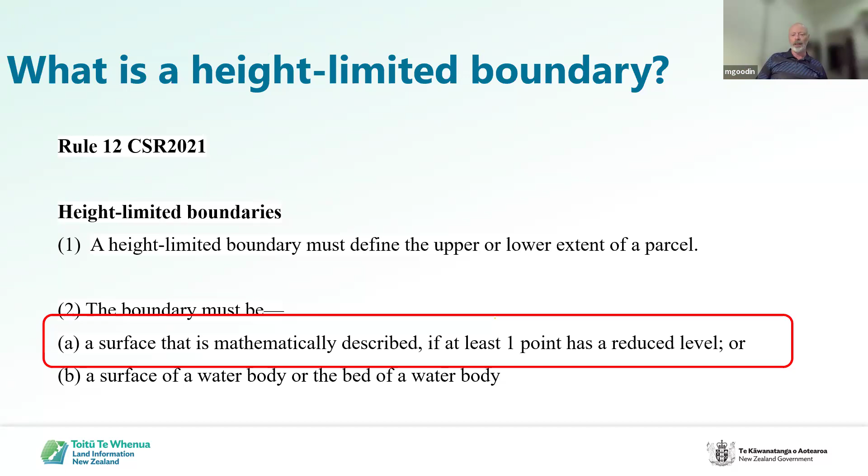So let's start at the beginning. What is a height limited boundary? Rule 12 of the Cadastral Survey Rules is probably the best starting point. For this session, I'm only referring to Rule 12.2a, which deals with mathematically described boundaries, particularly horizontal planes. As a starting point, the note 'all height limited surfaces are horizontal planes' would assist in meeting the rule. It's important to note that ground level is not an appropriate description for a height limited boundary anymore. You will see plans that still have it, but don't do that now.

So a boundary defined by a reduced level is a height limited boundary. A parcel with a height limited boundary is now a height limited parcel, and a height limited parcel has a height limited appellation. In the diagram, that sounds pretty basic, doesn't it? But in the diagram, both primary parcels share a height limited boundary, but neither has an upper or lower limit. I'll refer to this through the exercise as a step. This might seem very basic to a lot of you, but we do get CSDs where height limits, because they involve a step and not a true upper or lower limit, are submitted without acknowledging them as height limited parcels.

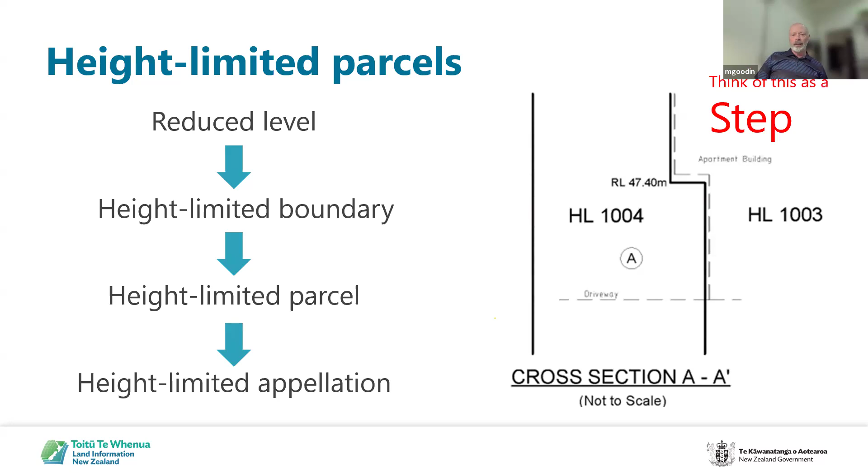So we've got our step. All right.

So let's start with a significant part of the process, the vertical datum requirements. All reduced levels in a survey must be in terms of a single official vertical datum. It's Rule 18. As hopefully you're all aware, the official vertical datum is New Zealand Vertical Datum 2016, and that's the only one that can be used for cadastral surveys, with the exception of existing unit plans, which we'll talk about later.

Now, put something in red there, so that must be important. Currently, there is no exemption under the cadastral rules that allows the reduced levels of an existing height limited primary parcel boundary to remain in terms of the datum of the source CSD that they're adopted from. So they must be in terms of NZVD 2016, unless dispensation is granted because the requirement is impractical or unreasonable.

Then you'll say, but what about non-primary boundaries? Because quite often in those situations, nothing's changing. Rules 60 and 75 may be interpreted to allow the reduced levels of an existing height limited non-primary parcel boundary that are adopted or accepted as part of a new non-primary parcel to remain in terms of the datum of the source that they adopted from. However, all reduced levels must be in terms of a single datum, and the CSD must not create any new height limited boundary points - that's key there. So if you're going to create new easements with new height limited boundary points, then all bets are off and everything must be shown in terms of NZVD 2016.

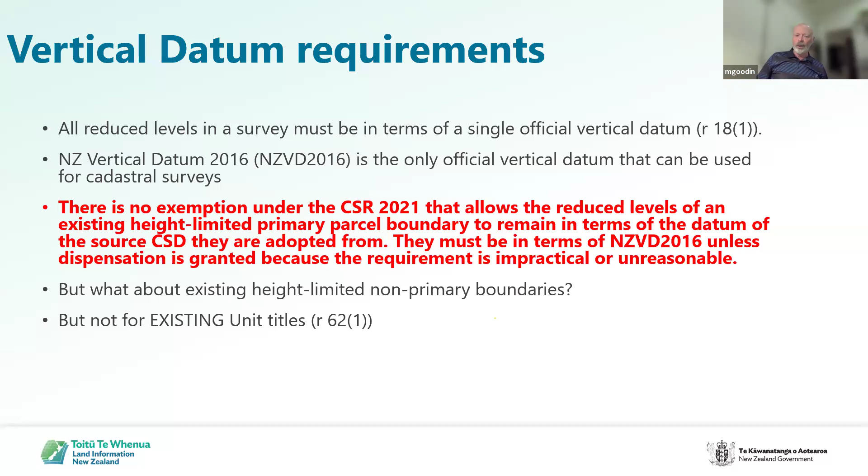Now, of course, it's different for existing unit titles. Rule 62.1 requires that reduced levels in a unit development must be expressed in terms of the datum used for the previously deposited CSD for that unit development, and this may be an unofficial datum. However, I'll discuss a bit later on - there are situations where that does have to change.

So, across the question, how about a dispensation then? The Office of the Surveyor General have been receiving large numbers of requests seeking dispensation from the requirement to be in terms of NZVD 2016. I'm just raising this - they have updated their dispensation guidance on the webpage to provide specific information about dispensation requests relating to the official vertical datum situation. Basically what they're saying is it will only be granted in exceptional circumstances. You need to provide your reasoning and really provide that sort of information that will assist. So that's on the dispensation page, if you want to have a look at that. I said I'd raise it for the OSG, so I have.

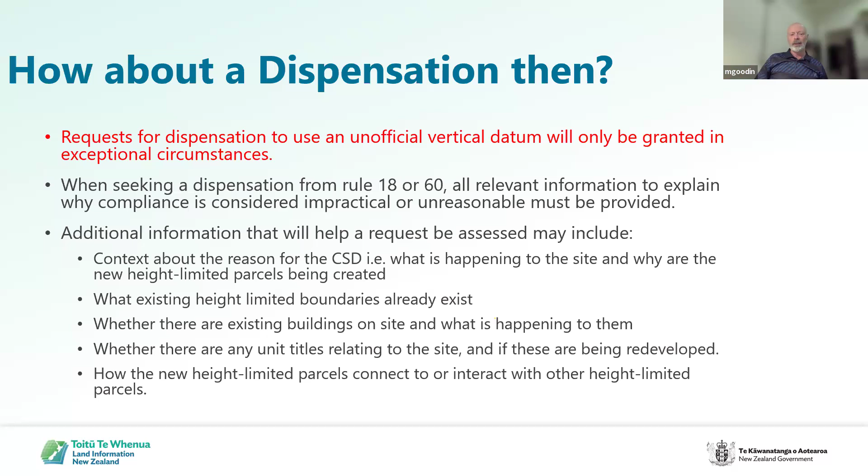Okay, reference marks. There are different reference requirements for boundary points on primary parcels, unit parcels, and other non-primary parcels. A new height limited boundary point on a primary parcel must be referenced by a PRM, and the survey itself must include at least 3 PRMs, 2 of which must have a reduced level. A new height limited boundary associated with an easement, lease, or covenant, or if it coincides with an accepted boundary, does not require a PRM. Now, we're talking PRMs, not BCMs. And a new height limited boundary point on a unit parcel - remember we're talking RLs, not permanent structure boundaries - must be referenced to a PRM. That's Rule 61.

This requirement also applies to unit redevelopment. So if you're going to retain RLs as your vertical boundary definition - you can change to PSBs if it makes it easier - but if you are going to retain your height limited boundaries, and as a result of redevelopment you create new height limited boundaries, then you need to meet the rules.

You need to retain the datum, but you need to meet these rules. The survey must include 2 PRMs with reduced levels, and any reduced levels for PRMs need to be on a survey diagram. That's just one of those requirements.

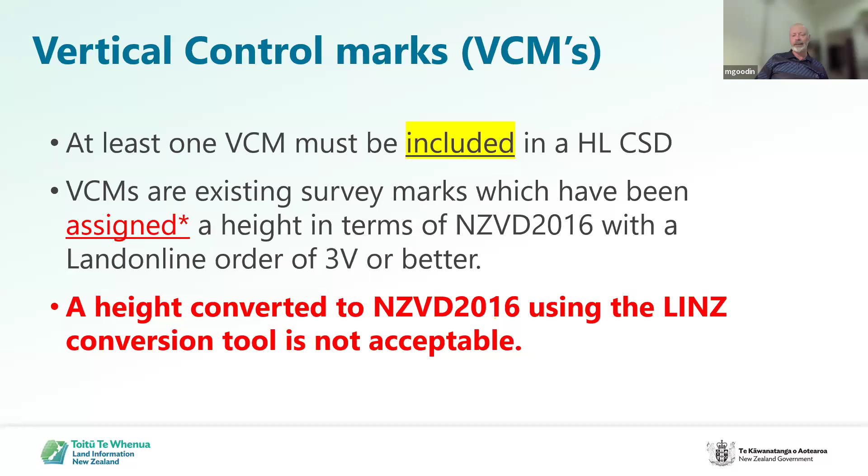I just thought - I think we did raise this, we'll have questions later on, that's fine. You often see the term 'VCM must be included.' I just wanted to explain that one - it is there for a reason, but sometimes people aren't quite sure what's going on there.

So 'included' means that it does not have to be spatially captured, but its details must be included in the CSD. So what the guidance is saying is you need to provide the reduced level in terms of the mark name of the VCM and its geodetic code, the reduced level of the VCM, and the applicable vertical datum.

I just highlight, please do not forget Rule 71 as far as field information - you can't just put that information on your plan, because your survey needs to be in terms of that VCM. So you need to have at least visited that VCM to prove that it meets the accuracy standard, still there for a start. So VCMs should only be old marks, and you will need to provide field information for that mark.

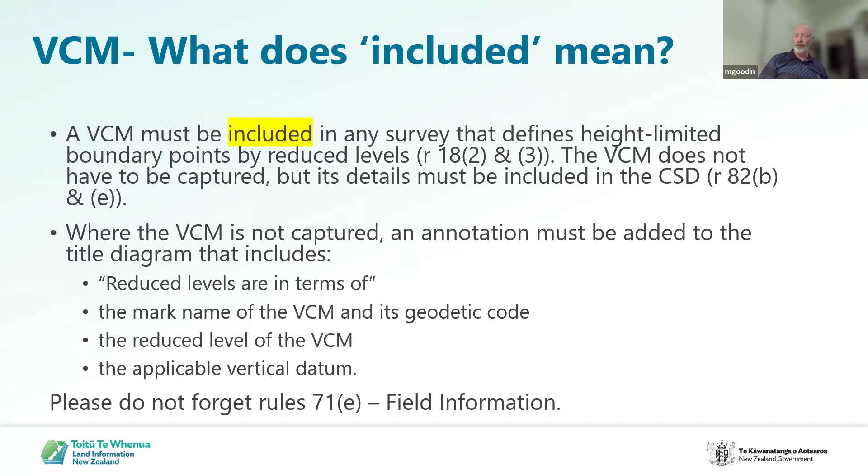Which I'll also comment on a little bit further on. There's a lot of further going on, isn't there? Anyway.

So we talked about parcel appellations - really important. A lot of people forget about this or don't think about it. Where it is a height limited parcel, it must have a height limited prefix. That's the rule, and that identifies it as having that height limited aspect - not just for surveyors, but for the owners, lawyers, whoever.

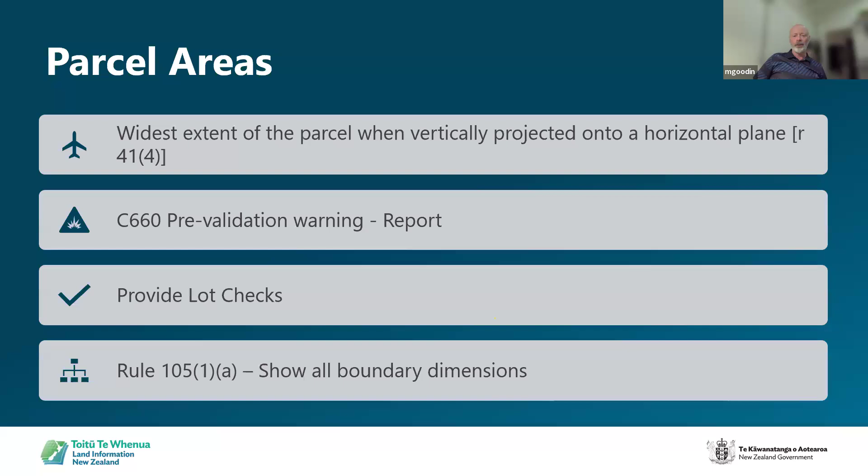Just provide those checks, make sure you've done your own - do your spatial check, your ground floor spatial check, and your upper level spatial checks as appropriate. Okay, so hopefully that's coming through clearly enough - that's the diagram from the guidance, and the green shaded area is the rogue area that gets missed.

Now, as I mentioned, old school - and I personally don't have a problem with showing it - is that some people will show different heights per other level. So the spatial capture, which is the one you'll show, even though it's on the spatial capture on the ground floor, it will be the full area.

But if you want to provide other heights, other areas at different levels, you can put it in user added text - just make sure it's correct. We're not going to check it, but if we do check it and we find it's wrong, we will requisition you because it's on a CSD. So just make sure it's not required, but you can get a requisition for it - just make sure it's right, please.

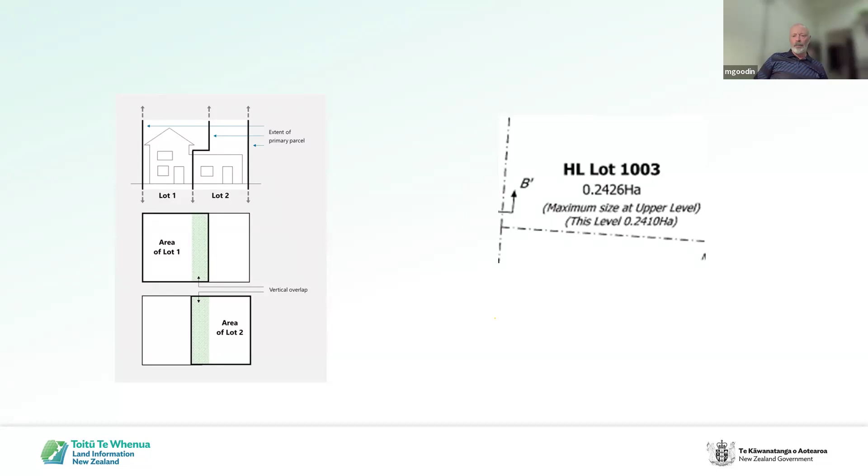Okay, schedule memorandum - upper and lower limits can be added to the schedule memorandum. There's no issues there. That may change in the future, but we're just testing that one at the moment.

The vertical step I talked about in a parcel is not considered to be an upper or lower limit. So if a parcel doesn't have an upper or lower limit, do not include it in the schedule - just leave it blank, don't even bring in the option of putting a limit on there, because it will get requisitioned if it's not the true limit. As I say, step - don't apply it.

Now, the other thing with schedule memorandums that does catch people out is the vertical extent of height limited parcels needs to be depicted in the title diagram - that's Rule 97, if you want to take a note of the rules. Because the schedule memorandum does not form part of the title diagram, including an RL only in the schedule memorandum as the only reference does not satisfy that requirement, and you will get pinged on it. You won't be told to take it off the schedule, but you will need to add it somewhere on the plan face.

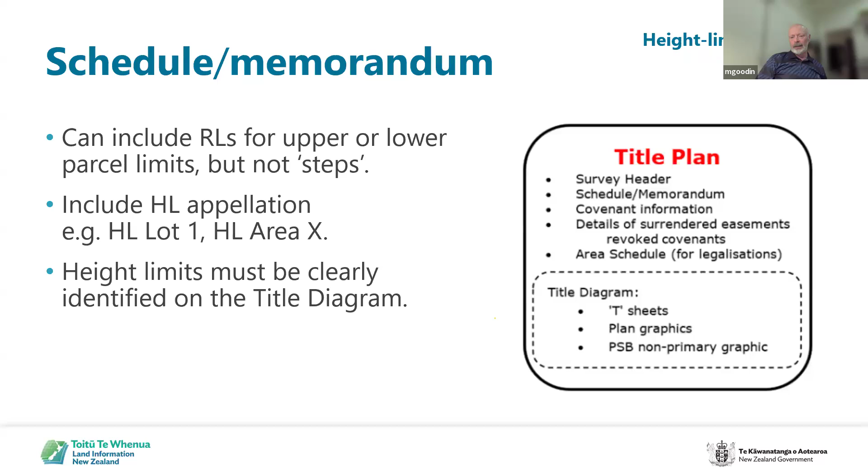Reporting on the vertical component of a CSD is typically not well done, but it is just as important as horizontal. If you're prepared to put effort into horizontal, think about the vertical too. We want to know how you are meeting accuracy tolerances, and it's not just for you guys.

Everyone else is going to use this, going over your plan. Another subsequent surveyor needs to be confident, so the survey must include details about the basis for determining the origin, and the report should describe how the reduced levels were established and confirmed.

You might be coming off your base, off your building, doing everything by GNSS, and you will then go and pick up your VCM as well, plus another to check your heights, hopefully with a bit of redundancy at least. That information is really helpful for everybody, it shows how good your levels are.

You don't know whether that mark is good unless you've got just good survey practice, which some of us older surveyors still hang our hats on.

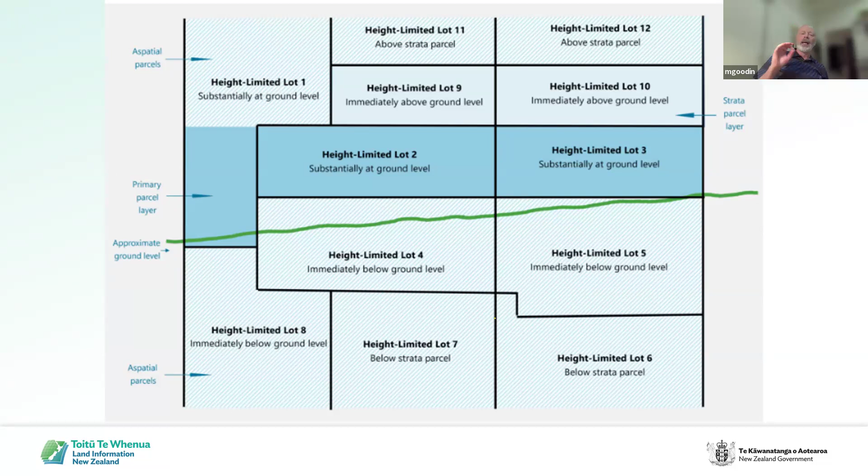Now, I know you're going to say lot 1 doesn't, but it does, trust me. So they get captured in your spatial capture layer, the primary parcel layer. Now, either lots 9 and 10 are either captured in the strata topology layer or 4 and 5. So let's say we captured 9 and 10 in the strata topology layer.

But because you can see that height limited lot 1 has that darker blue capture, it doesn't get captured in the strata layer at all. It just retains in there. And what will happen is all the other information would be shown in plan graphics.

So lots 11 and 12 would be in plan graphics, and 4 and 8 would be in plan graphics, etc.

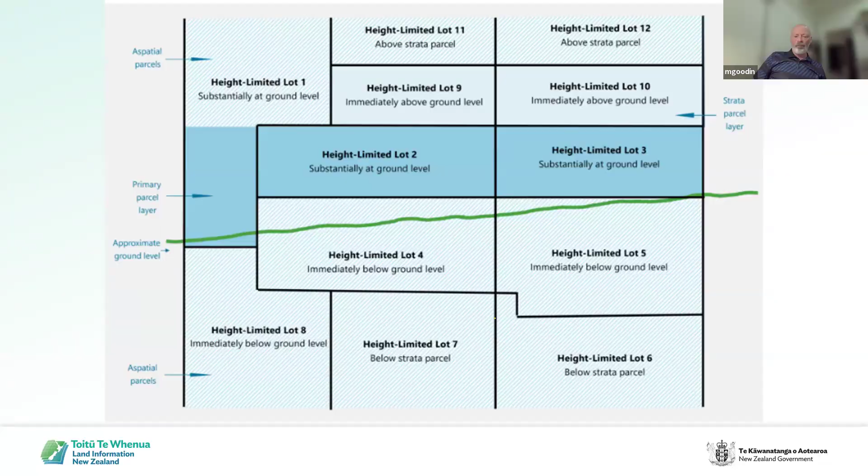Coming back to the original slide, unless an exemption from the standard is granted. I do get in a little bit of trouble referring to this, and I have tried to convince a few others. In my opinion, capturing those parcels immediately above the spatial capture in strata doesn't really add a lot, especially when, for example, you've got a 10-story building with ground level captured at primary, and levels 2 to 10 captured as plan graphics. What is the advantage of capturing level 1 at strata?

Now that's a different story for a tunnel or a bridge, for example. The guys working on CRL up in Auckland, having that tunnel captured in the strata layer is really good, because you can click on it and people can actually see how that strata connects up. Whereas in the building situation, it doesn't really add a lot, and in fact it actually just causes confusion. So I would grant you an exemption to just capture the ground floor and then everything else on plan graphics. And if you get a requisition, tell them to come see me.

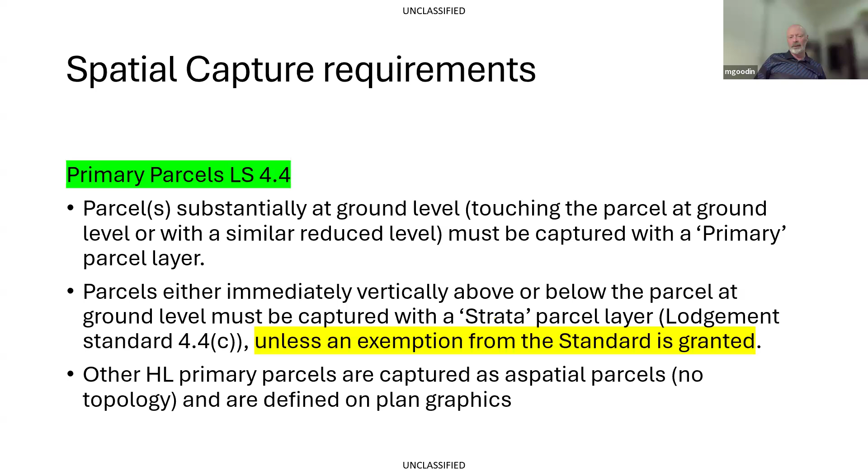So we're looking at non-primary parcels, the lodgement standard again. There's similar requirements, but in this situation you have the secondary layer, tertiary layer type arrangement, and they should be used. So you've got to think about this - use it, but don't confuse this.

This aspect is height limited non-primary parcels. Don't get too confused with your standard right of way and water easement at ground level - they're going to be crossing, and the use of tertiary and secondary is, in the end of the day, the same thing. It's to allow these parcels to cross, because Landonline doesn't allow it, or causes problems for it. And with new Landonline in the future, once we've got some more enhancements, that may be a thing in the past. But just make sure that you are capturing, and then once you get the secondary, tertiary, then you go into plan graphic again.

So you're more likely to have the three components in the non-primary scenario.

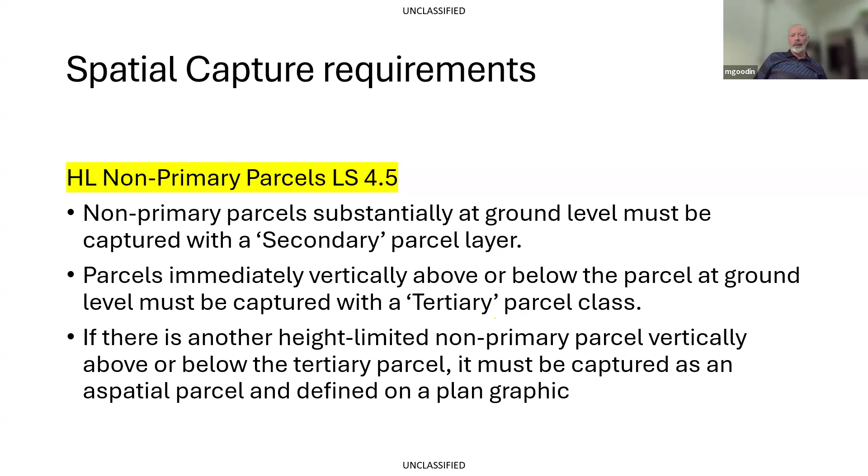All right, so that's sort of the obvious big ticket items in the guidance. What I was going to do now is just do a little bit of a practical application and some things that I really like to push, and really just diagram presentation, really the plan graphic aspect of it.

How is a 3D element shown in 2D so that it's clear and unambiguous, and importantly can be understood by the layperson? Sometimes we get responses to requisitions stating other surveyors can work this out. My retort to that really is that it's not about other surveyors or even LINZ. It's about the owner, your client. Can they understand it? Can future owners understand it, work it out on their own without having to come back to you guys? Now that may cost you a bit of money, but let's be fair.

So there really is no one method to depict height limited boundaries, and I suppose that's actually why we see so many issues. So this is just one interpretation. Hopefully it's clear to you, but what I'm providing is just a very basic toolkit to have a think about these. So what we've talked about, that spatial capture is fine - represent parcel footprints at ground level, you're all into that. And then basically plan graphics showing slices at appropriate RLs above or below that ground level view.

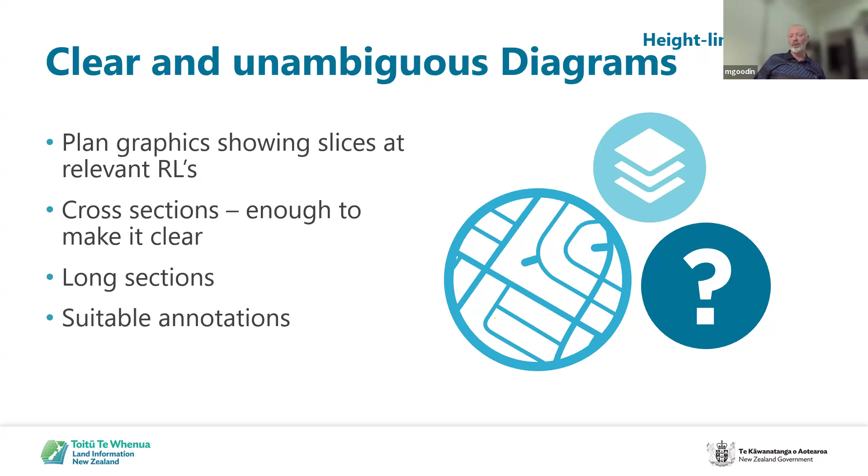So just think about that. And the other one, of course, is obviously clear notes or annotations. A lot of guys and girls spend a lot of time getting some very good annotations. Some people don't, but most people do. So when you've put it in, before you submit the plan, have a read and say, oh, hang on, that didn't quite make sense, or whatever. So we have this.

So we have the depiction of the vertical extents on the diagram. Where it is a simple horizontal plane, depiction can be as straightforward as the annotation on the plan face. And in this situation, we've got a message down the bottom, pretty clear.

Now, if that wasn't there, and it was in the schedule, then, as I've said, you'd have to put something on the plan face. You're not going to go with just a simple note like that. You'd be then getting into cross sections and putting cross sections in. So you don't have to put a cross section, you can just cover it. If it's a simple horizontal plane like this, you can get away with a note.

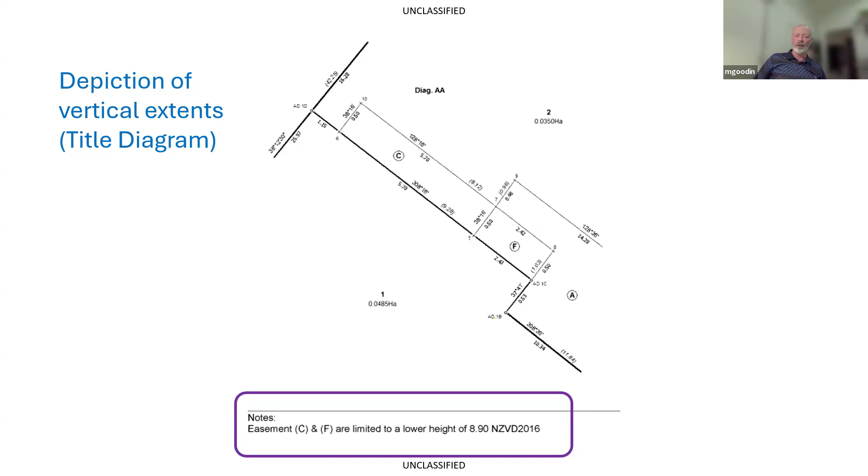In this particular example, I probably would have preferred to have something like easement C & F limited to horizontal planes at a lower height of 8.90 NZVD2016, something like that. Just because it is that situation where you do show a cross section showing the height, doesn't necessarily mean that it is only a horizontal plane. Most people would probably say yes, it does, but I'm just saying you can remove that potential ambiguity by making it pretty damn clear. Most people who have got complicated surfaces probably take more time in it, which is fine, which is good. But you just have to think about that one as well. Just put it into your toolkit.

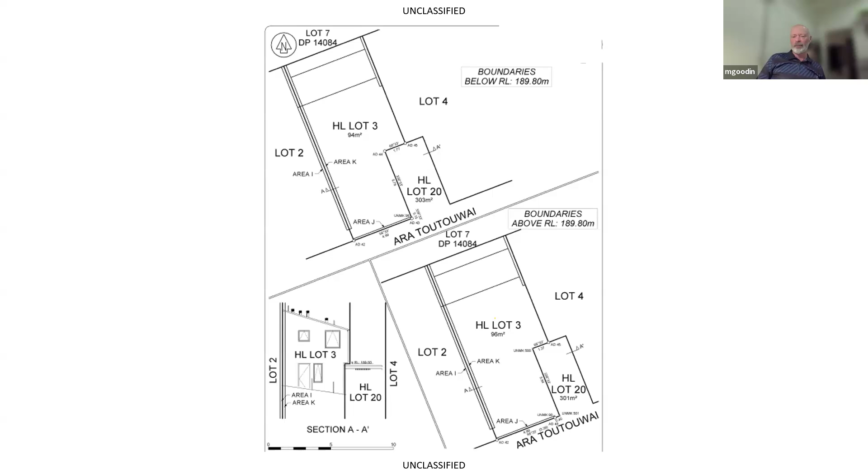So this is a slightly more complicated example. We have a step in the boundary at RL 189.80, and to identify the shift in the boundary, two plan views, all good, with the different plan views well labelled. So we've got a couple of labels there, pretty good. And they've also provided a cross section, which is great.

The occupation detail is a solid line and is not ideal. I've just talked about that. But in this case, it didn't really cause too many problems. Still have an issue with maybe area K, but the CRS who looked at the sums thought it was okay. But just something to think about.

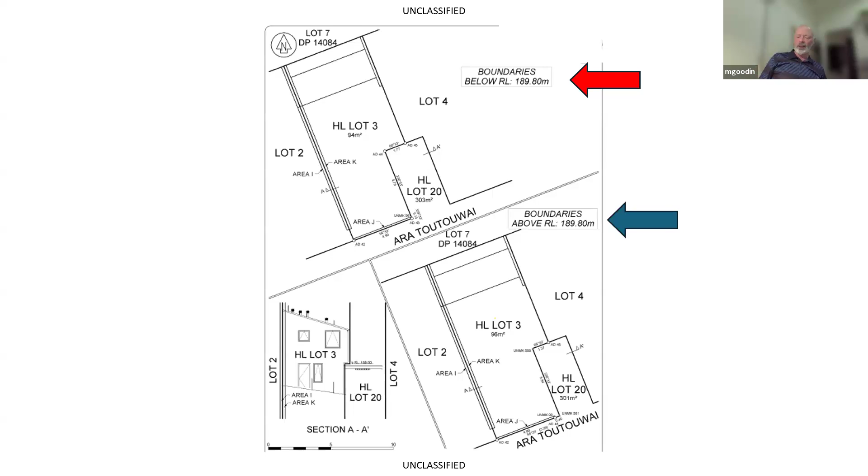The important thing that this plan does well, it clearly shows the boundary bearings and distances and where they are at different heights. So we've got the two different heights, and as I say, Rule 105.1 A requires all bearings and distances of every right line boundary to be shown. And so in this case, on the upper level, those distances are different. So this person can go around their different level, work out the areas, work out what they own, blah, blah, blah. What I particularly like about this one is the inclusion of common point numbers between the two views.

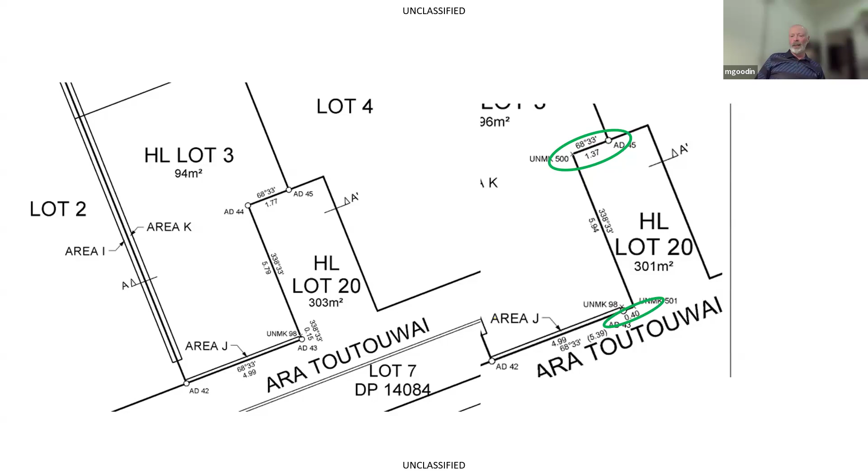Now, I've kind of spliced these two views from one page to another, and so it's kind of a situation where there are some common views on the other side. So someone can actually look at the two graphics and say, okay, that matches them, and that's really important on a complicated arrangement. Probably, I don't want to be too critical, but in the situation, there are two areas shown.

Probably in the same font. I can't remember whether this was exactly what happened, but there must be a height limit somewhere. The actual full height limit's the 303, so the 301 possibly could have been shown in italics. This is the plan graphic, so you've got pretty much control of what you're doing.

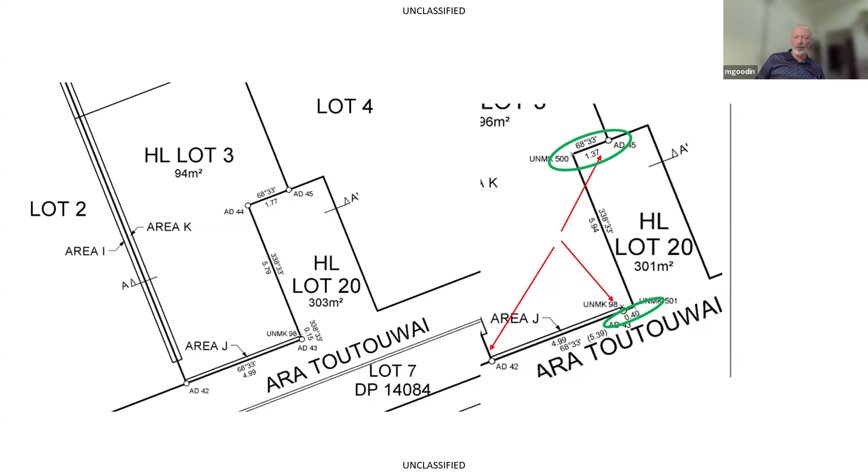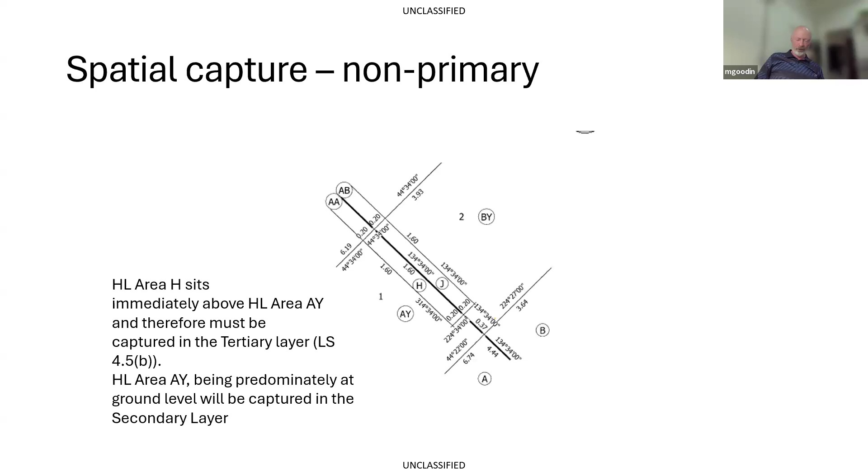However, while it may be clear in the parcel capture, it needs to be clear on the diagrams, because you've got to think about these things. At the moment, a lot of owners, a lot of lawyers don't have spatial Landonline licenses, or don't know how to use them, or whatever. And more the lawyers then.

So, as we talked about showing building occupation features, look at the situation. Do AY and BY have lower limits, sloping lower limits? Now, I know it talks about ground level, but is that considered a lower limit?

So if you're going to add that sort of detail, just suggesting that you mix up the line styles to remove the ambiguity with non-primary parcels. Also, with cross-section indicators on plans, they're showing where the section lines are. Putting a full section line across a townhouse development with a myriad of easements as a solid line just makes it all confusing. So either think about cutting the line and just showing it either side, or if you're going to show it all the way across, just use a line style that isn't going to confuse with the lines you have to capture at a certain type.

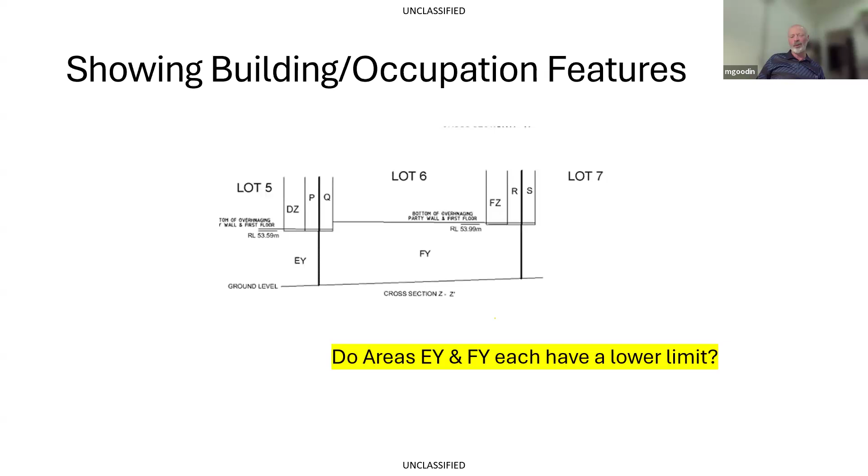Now, a primary parcel boundary can't be a PSB.

Now, coincide for a lot of other CSDs is quite a good term. It means that it sits above that - it's the same line, but it sits above it, not trying to replicate it. You'll see that in unit plans. So coincide, think about it, pop that one back in your bank that you can use.

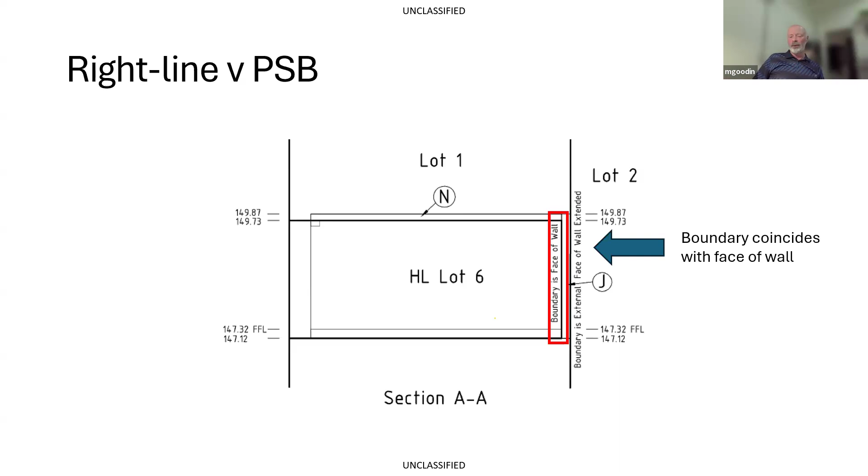Things like 'boundary coincides with face of wall' just clarify that, because there will be a right line boundary, and once again, you're not allowed the combination of right line and PSB.

I've just noticed time is ticking away, so I better get onto it.

Case study 1. Before we start this - some of these examples are not intended, hopefully people can't identify them, it's not intended to embarrass anyone. If you do recognise a plan, take it as that you're helping educate your fellow professionals, and hopefully we learn something and move on. These just happen to be examples that have come across my desk at some stage.

These aren't complicated examples, but the idea of what I'm trying to do here is, you get guys working on CRL or big buildings or whatever, and these will be quite simple. The idea of the examples is that they form building blocks, and you build through to whatever complication you want.

Now, different story with complex mathematical surfaces. That's another story, and my advice is to try and avoid those as much as possible. But if you can't, then you're really just going to have to make it as clear as possible, and then give Tony Nicol a call.

So this example is a townhouse development with quite a few easements. This is just a small part of it. Unfortunately, when I put this together, I should have used more primary parcel boundary, but this is a situation where we probably get more requisitions from non-primary, so it does make sense because they get more fiddly. So just one small part of the development.

So this generates a 3-layer scenario, which may or may not get resolved later on, but basically something to consider. And so it was quite a complicated little number, the 3 layers there.

So was the relationship of the overlaps clear in the plan view? In combination with the cross section, you could argue that it was. And this is why a good cross section is important.

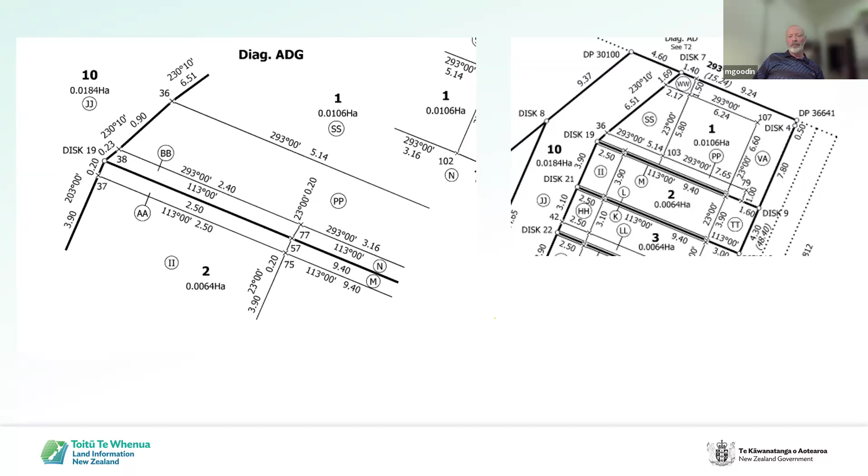But let's have a look at what parcel capture actually showed. Parcel capture showed area SS is that shape there, so area SS runs under area BB. So that was correct. Area BB was in the tertiary layer, looked fine.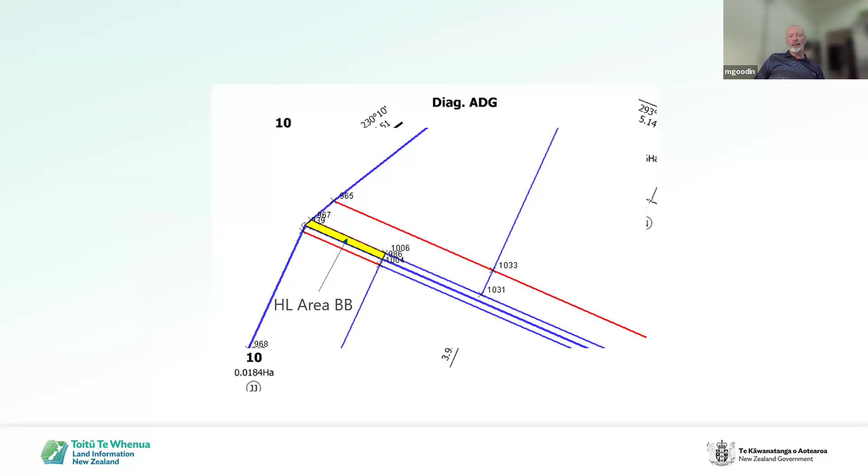And then PP came over the top. The cross-section clearly shows that PP sits above BB, but this capture shows that PP goes around BB. And so that's kind of the scenario where you're trying to create 2 tertiary, you kind of have tertiary over tertiary.

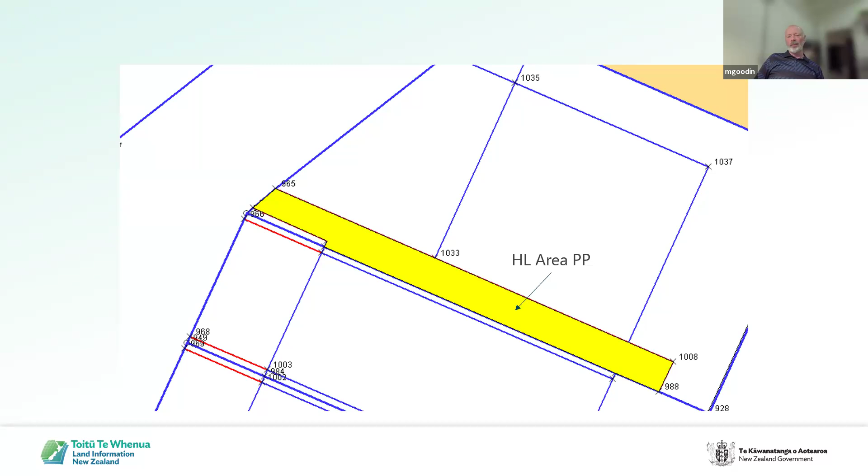So just something, this particular plan kind of piqued my interest at the time. I said, well, hang on, this is not quite right. So we sent it back on requisition.

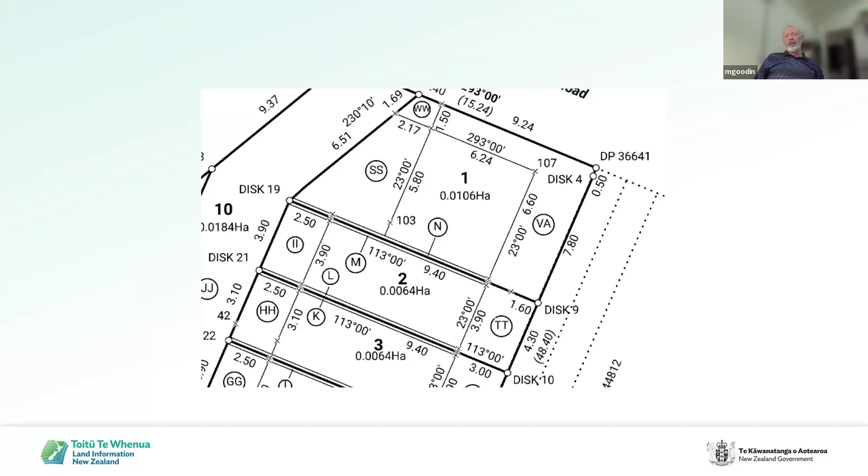And what actually happens now is that PP was no longer spatially captured. Now it's shown on a plan graphic, and it shows the full extent of PP, fully dimensioned, sitting up above plan view. There is PP at RL 42.22 and above.

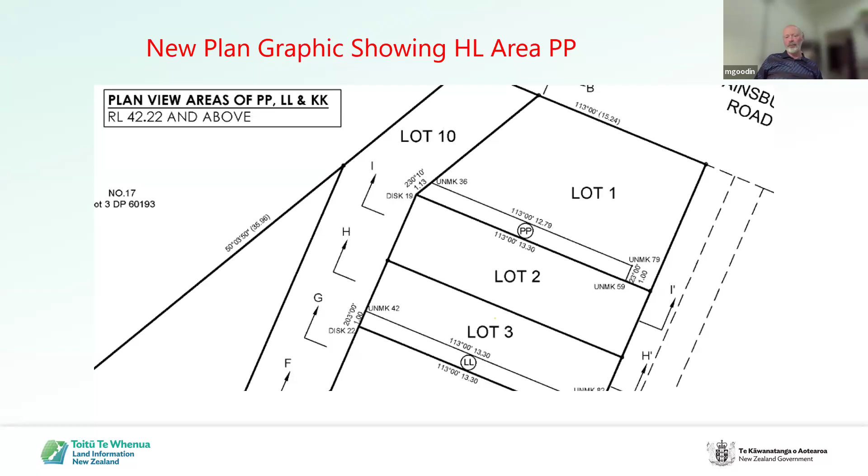Good clear heading there. And this particular one also included a number of common marks that relate from this plan view to the spatial plan view. So really, really good.

On the P sheets, it was made clearer that BB sits above SS with that note there. So that's pretty clear. And in the cross section, for example, the dotted line was annotated. There was removal of the lower limit, so SS obviously no longer has a lower limit.

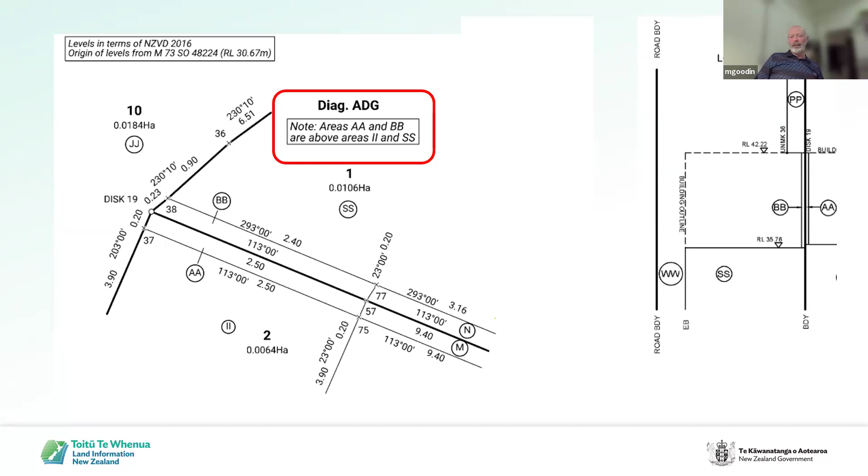And so we've got the secondary layer, got the tertiary layer, and no topology captures no topology. You got to remember, I just had one the other day where somebody didn't capture their aspatial parcels correctly. So just be aware of that.

Now you could argue that BB, that layer could be different. It could be BB secondary layer, PP tertiary layer, and the lower one SS as a plan graphic, depending on your interpretation of ground level. But the way that was done was fine.

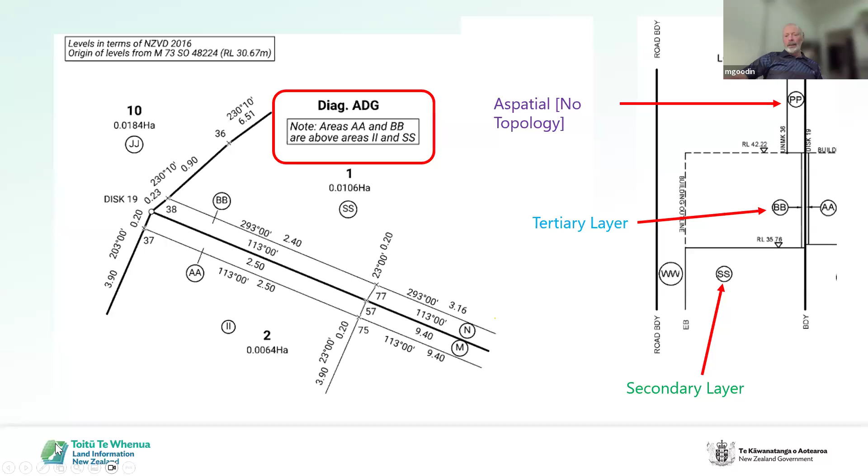Just trying to see, I'm taking a bit longer. I just don't see any questions.

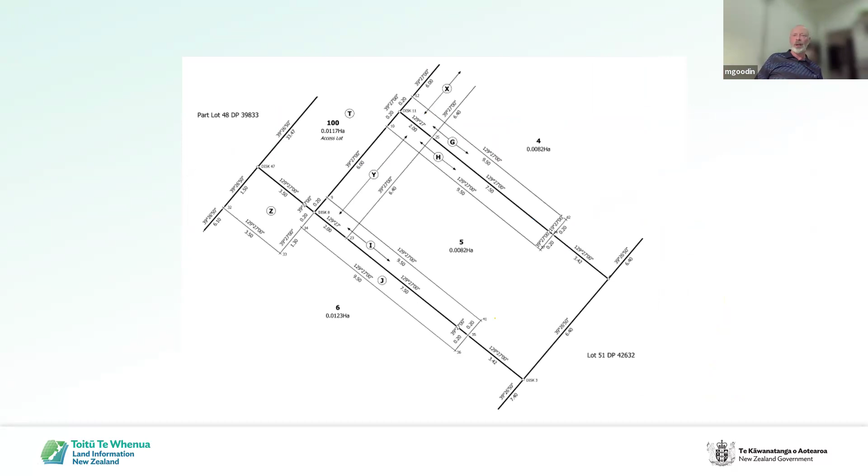So the alternative to that notation on the previous slide, you could show cross sections like that. It shows that G, for example, goes that full extent, and X, so that's showing a combination, and then providing a cross section, you can see that that easement there sits above that easement there.

Just ways of doing it. Just think about how you're doing these things. Got a good clean cross section like that, building line pretty clear, easements fine. In that situation with the plan graphics, you probably should have height limited X, height limited Y, etc., because they are plan graphics.

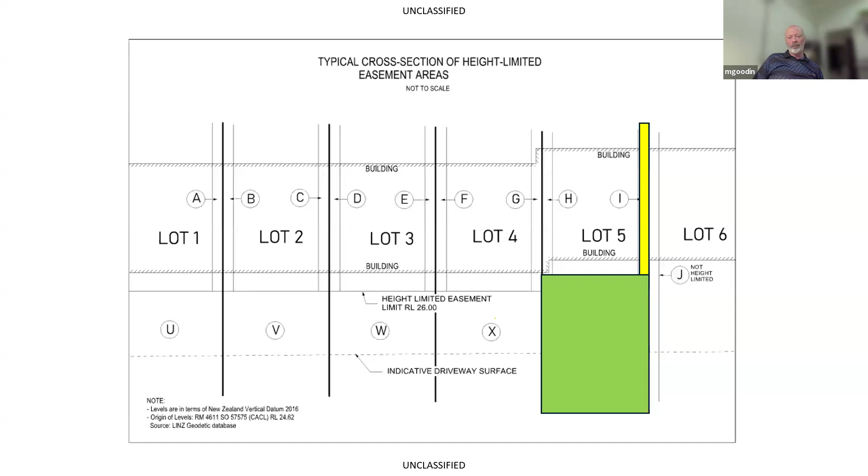You CAD, so you can do that. We know that on Landonline you can't. And I talked about consistency, but in this situation, you probably should have height limited, just HL. They don't have to put height limited.

The more complex an easement or CSD is, the more plan views, sections, etc. you need. But you can use typical diagrams if they're clear and appropriate, and done properly. This is an example of one, and it's pretty clear. If you can get away with that in this situation, a reference to horizontal planes would have been helpful.

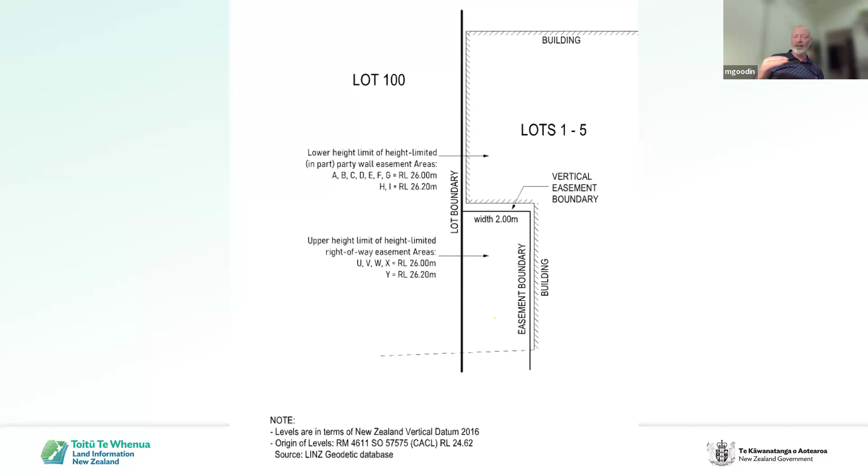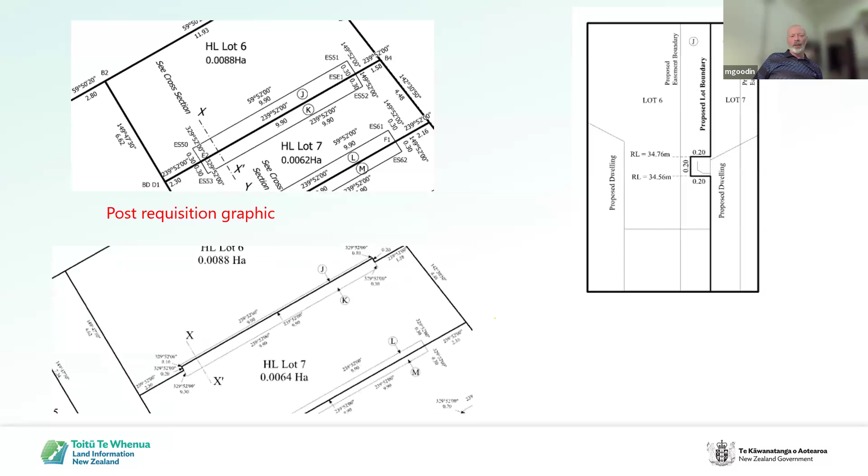So we get the situation where a plan graphic was added, showing the extent at the upper level, with a good heading showing it was between these RLs. Now they can work out the impact on the area of height limited lot 7. I noticed we didn't get them to change height limited lot 6 and lot 7, but some things do slip through.

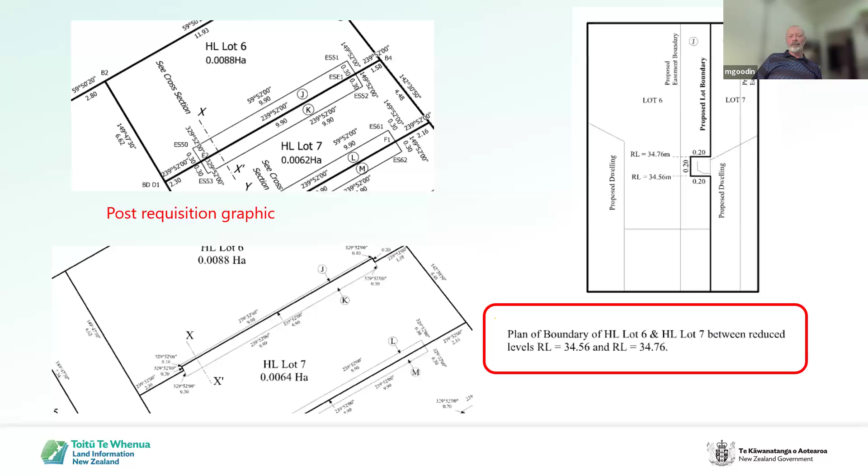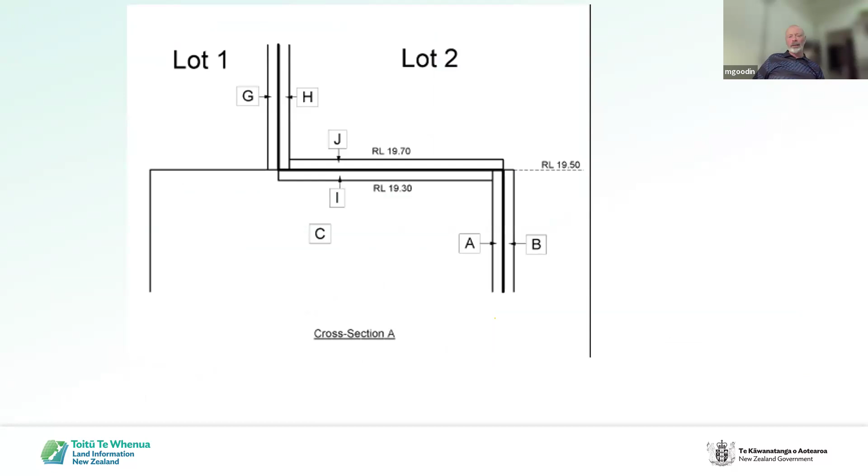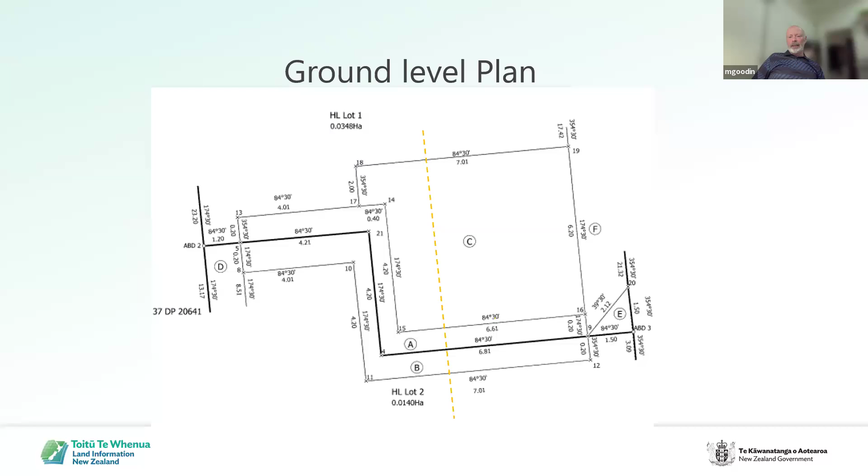Third case study was an interesting one. It had this cross section showing various non-primary parcels - quite a complicated little system, not easy to represent, but they did a good job here. Again, height limited lot 1, height limited lot 2 should have been the appellations - really just a plan graphic, no reason you can't put that on there. They provided that cross section was approximately through there, and that was the plan graphic showing that.

Now, what it doesn't actually show - this is a good heading, level above 19.5. It could probably have been level above RL 19.5, which would have been more accurate, but we can live with that. We got area J shown there, area C there. But where was I? If you remember correctly, I was sitting underneath there, and there was actually no horizontal definition of I in that scenario.

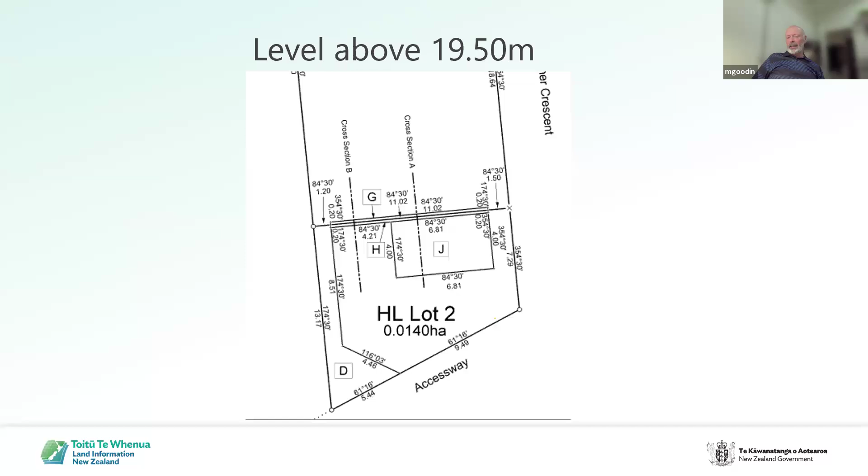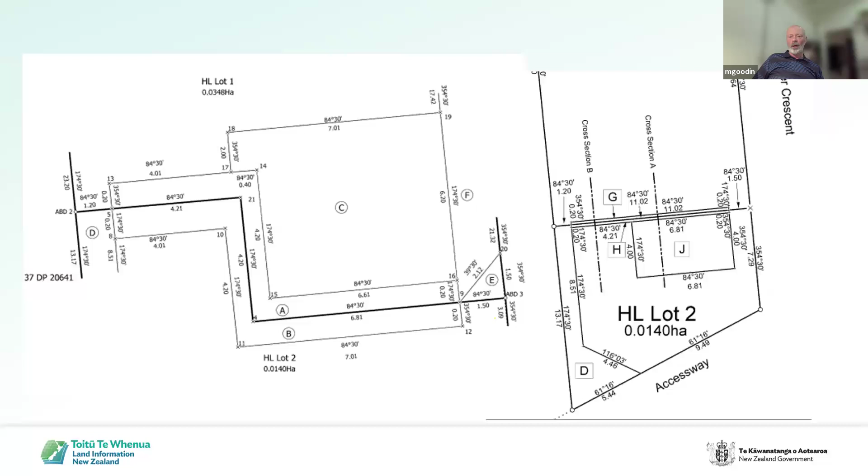That's kind of what I said - if you do your own calc sheets of each parcel at different levels, that may have been picked up. I didn't do that, so that's basically the scenario showing J but no I. Post-requisition, they provided another view which showed I dimensioned, showing the relationship with C, because C comes up behind it and goes higher than it. So a good result all around.

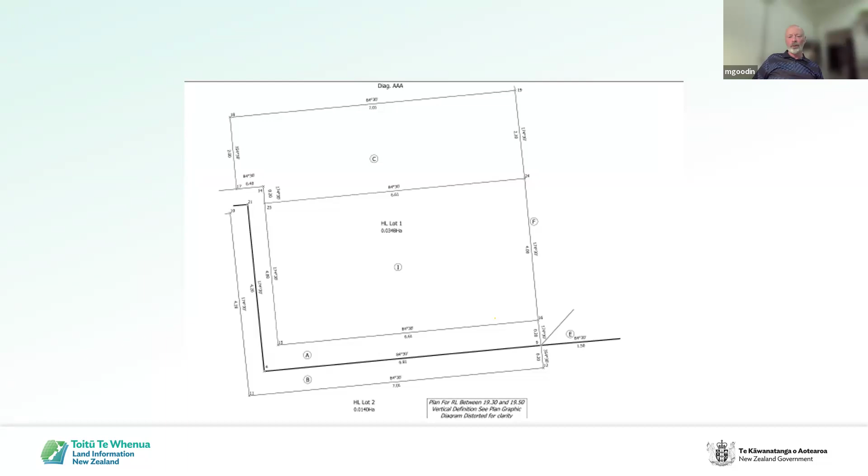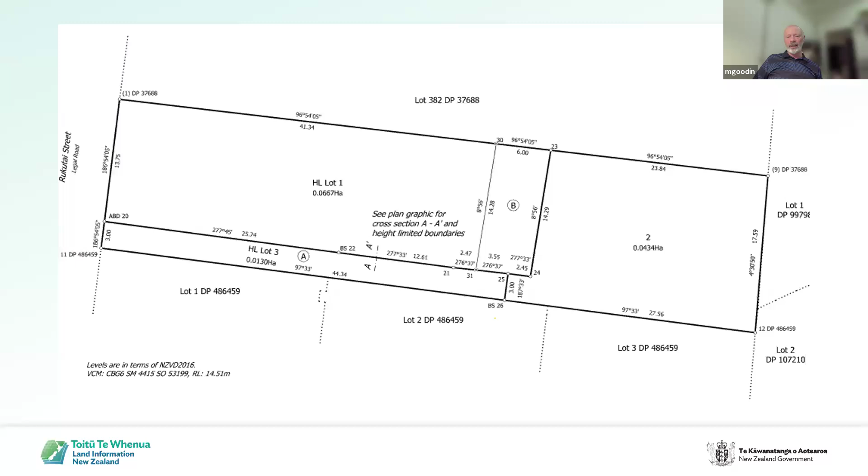Fourth one, getting to the end. Most of the focus has been on ones that had little challenges. This one was quite a simple one, but again the building block concepts are the same. So this is what's captured at spatial, and then the plan graphic with the boundary dimensions at the upper level.

And then we have a few common mark names on that from each level, so people can associate them. You don't need them all, just the relevant ones. Quite often some people just show parts of the parcel, but as long as you've got those common mark names, it's really quite helpful.

The occupation detail on the cross section - the line style was all good, didn't conflict. You can see the difference there. The section line shown there - yes, it's a solid line with a couple of arrows, but there's no way that's going to get confused with an underlying parcel boundary or anything, so it's fine.

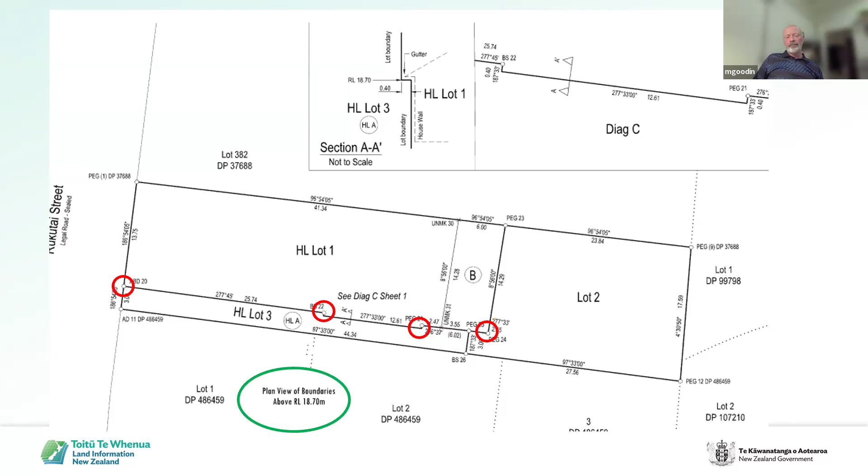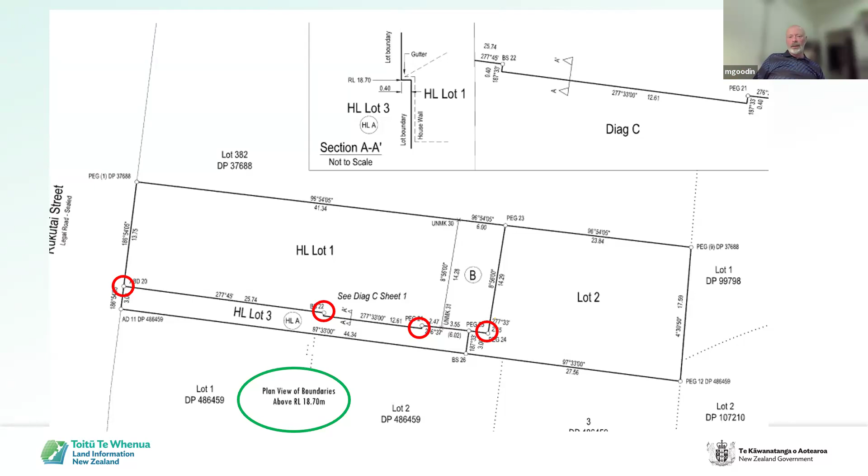Other points - there was a descriptor on that plan. You don't want to just leave it as the plan; you want to provide a descriptor of what level you are showing it. Typically showing it as level 1, ground level 1, can work, but if you're basing it on an RL and you have that information, actually working off that RL is probably a lot better. You can put them both in if you want, as long as they work. And that's me, getting pretty close to time.